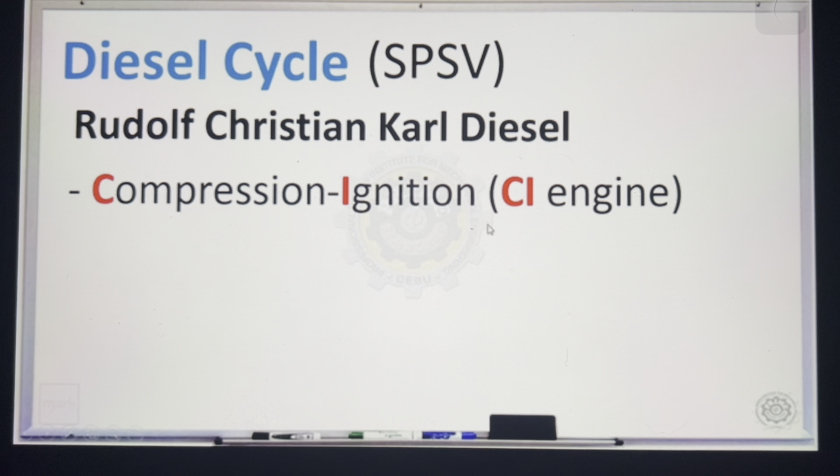Diesel cycle. Ang nag-develop ng diesel cycle, si Rudolf Christian Karl Diesel. Yung process involved sa diesel, SPSV, sabi ni Diesel. Kung ang Otto cycle, tinatawag na spark ignition cycle, ang diesel cycle naman, tinatawag siyang CI engine or compression ignition cycle. The ignition of the fuel, which is injected into the combustion chamber, is caused by the elevated temperature of the air in the cylinder due to mechanical compression. So in this cycle, hindi na kailangan ng spark plug to initiate the ignition. Sapat na yung pagko-compress. Once i-compress mo, dahil sa compression, nagkakaroon na ng ignition inside the cylinder. So this is CI engine.

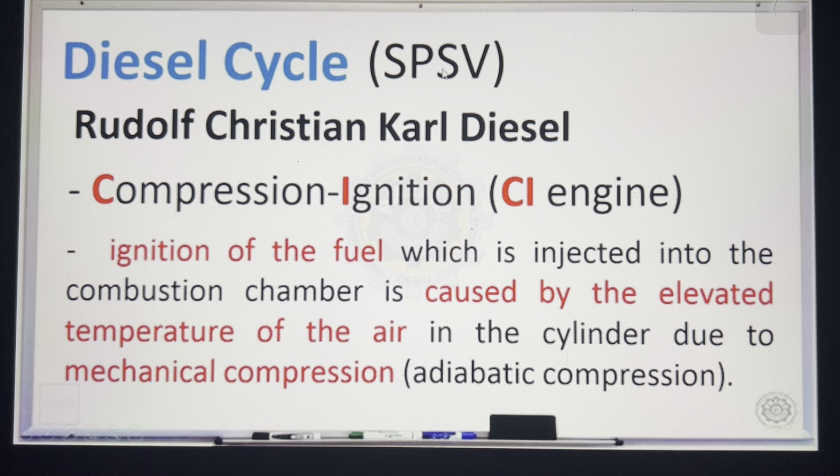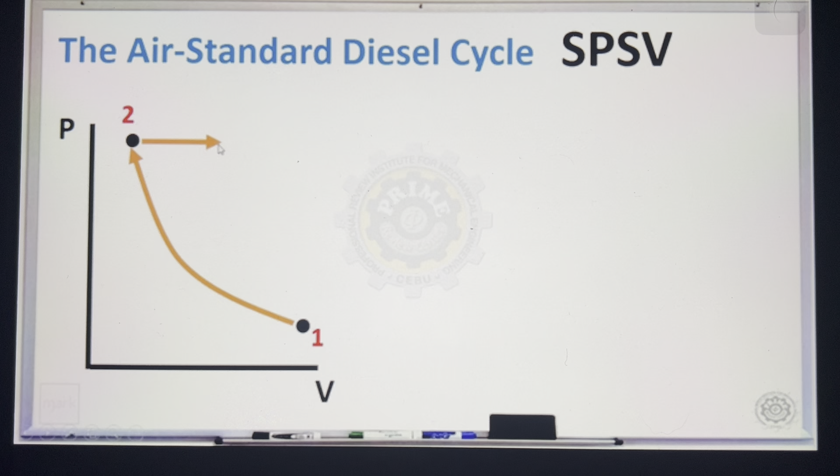Ngayon, ang palatandaan natin dito or technique, SPSV, pero kailangan siyang i-drawing sa PV diagram. Kailangan na-drawing natin sa PV diagram para meron tayong guide. Simulan natin dito, isentropic. 1 to 2, isentropic compression. 2 to 3, isobaric. 3 to 4, isentropic. And then, 4 to 1, isometric. So, ito yung PV diagram ng diesel.

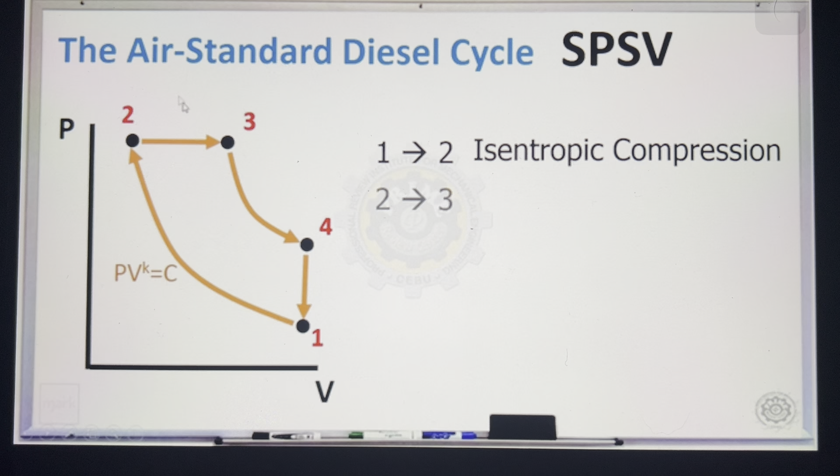1 to 2, isentropic, lumilit yung volume, compression. 2 to 3, dito papasok yung init. This time, isobaric yung process. So, 2 to 3 is isobaric heat addition. 3 to 4 is isentropic. Lumalaki yung volume, expansion. And lastly, 4 to 1, dito lalabas yung init. Constant volume yan. So, isometric heat rejection.

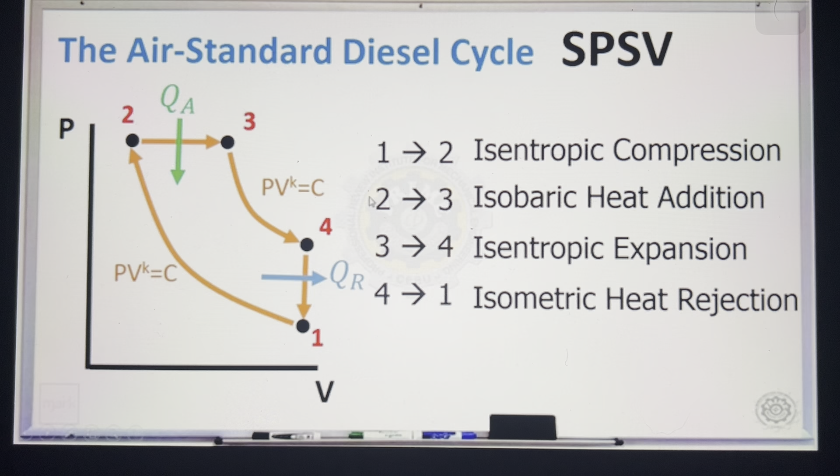Yung process na yan, yung mga pangalan na yan, hindi naman dapat kabisaduhin kung naiintindihan yung PV diagram. Kailangan naiintindihan ito. Ngayon doon tayo sa mga formula. Still, ito pa rin yung general formula natin para sa mga power cycles. Ngayon maging specific muna tayo.

How to get QA? Ang QA nangyari sa constant pressure process. Ibig sabihin, MCP delta T. Ang delta T natin is T3 minus T2. Pag QR naman, pinag-uusapan, constant volume yan. So that should be MCV. Temperature difference, T4 minus T1.

Yung CP, mga constant yan. Ang CP ng air sa SI, 1.0062. Sa English, 0.24. Ang CV ng air, 0.7186. Sa SI, sa English, 0.171. So, please memorize constant. Memorize yan.

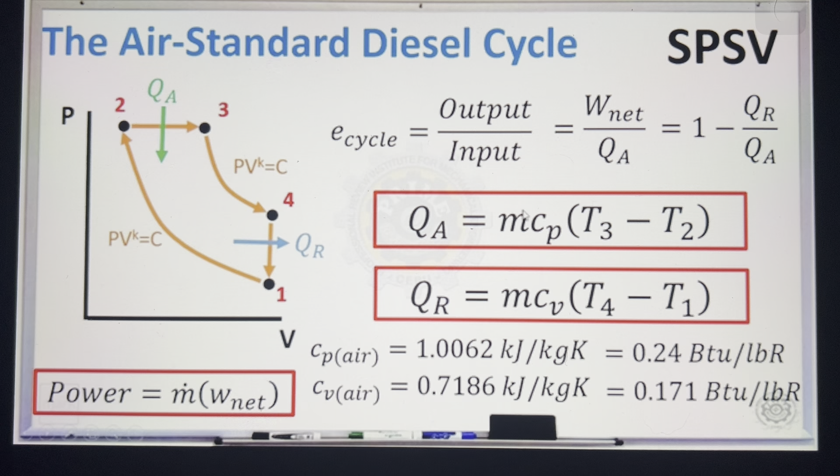Para makakuha ng power, mass multiply sa specific work net. Pag ang kailangan specific QA tsaka specific QR, assume nyo lang yung mass to be 1. Kasi, ang unit natin per kilogram or kaya per pound. So, pag yung mass 1, specific yung answers.

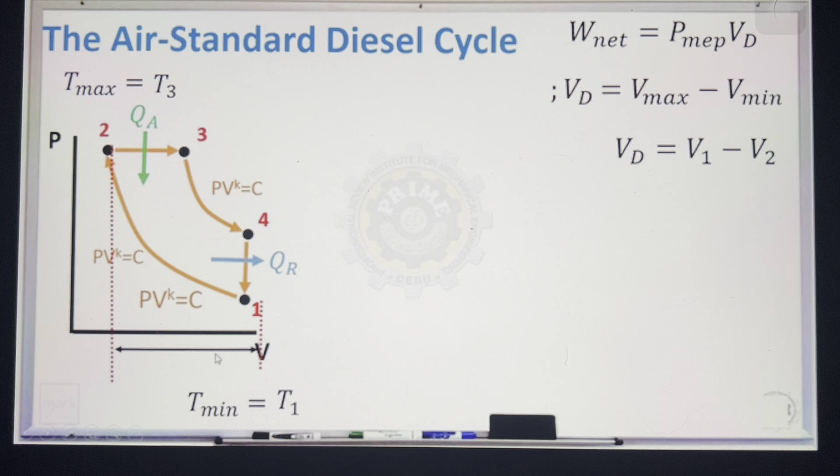Same concept, work net is PMEP VD. Ang VD is maximum minus minimum. Ang maximum volume is V1, ang minimum volume V2. So by inspection, ang maximum temperature in the cycle is yung point 3. And then ang minimum temperature is yung point 1. Still, andito yung ating volume displaced. Andito yung clearance volume. Same analysis.

Ganun pa rin yung formula, hindi nagbago. Clearance volume is CVD. Yung RK, compression ratio is maximum over minimum. That is V1 i-divide ng V2. Tapos, ang formula natin na C, dinerive natin kanina, that is 1 all over RK minus 1. Same formula yan sa Otto cycle. Ang nadagdag sa diesel cycle is yung tinatawag ng cut-off ratio.

Remember na yung cut-off ratio nandito sa QA. Ratio lang yan ng dalawang volume. Malaki over maliit in this part. Tandaan na, yung mga ratio natin greater than 1. Ang cut-off ratio is V3 over V2. Ngayon, pwede pa natin yan palitan in terms of temperature.

For example, kung i-consider mo yung process 2 to 3, ang process 2 to 3 is isobaric. So, if you will apply the combined gas law, P2, V2, T2, parehas dapat sa P3, V3, T3, and then you can cancel out yung pressure kasi constant pressure tayo. So, lumalabas yung ratio ng volume na V3 over V2, parehas din pala yan sa ratio ng temperature, T3 over T2. Dito na-derive yung relationship.

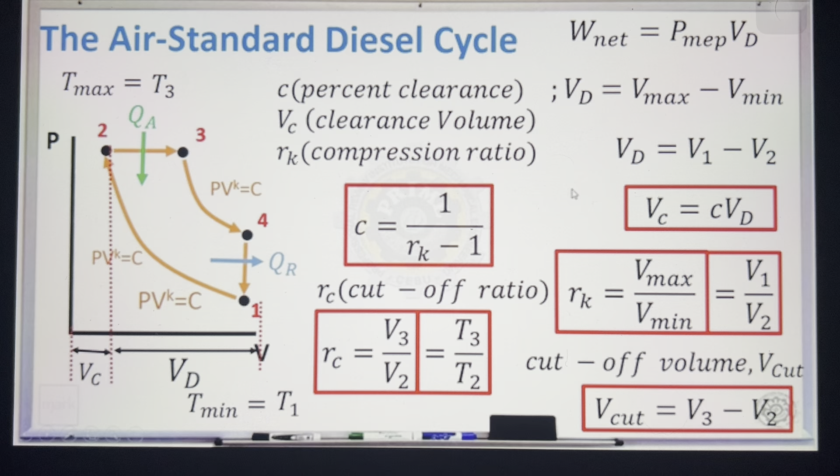Dito, pwede na tayo mag-solve ng mga problem solving. By the way, meron din pala tayong shortcut regarding sa efficiency. Pinaliwanag natin sa Otto na ang shortcut ng Otto, 1 minus 1 over A. Pinaliwanag kanina. Ngayon, for diesel naman, ang shortcut ng diesel cycle is 1 minus B over A. So, effort tayo regarding sa A and B.

Yung A, okay, that is RK raised to K minus 1. Yung B naman, para madaling maalala, tingnan mo ito, gagawin mo itong C, tapos ibaba mo yung minus 1. Yung K, ibaba mo dito, and then copyin mo yung RC minus 1 na may parenthesis. Mag-effort para yung mga formula makabisado. Kasi sa simula, mahirap. Pero kung lagi nyo itong isusulat, makakabisado nyo rin yung A at B. Gamitin yan para mabilis makuha yung efficiency. So, this is for Otto.

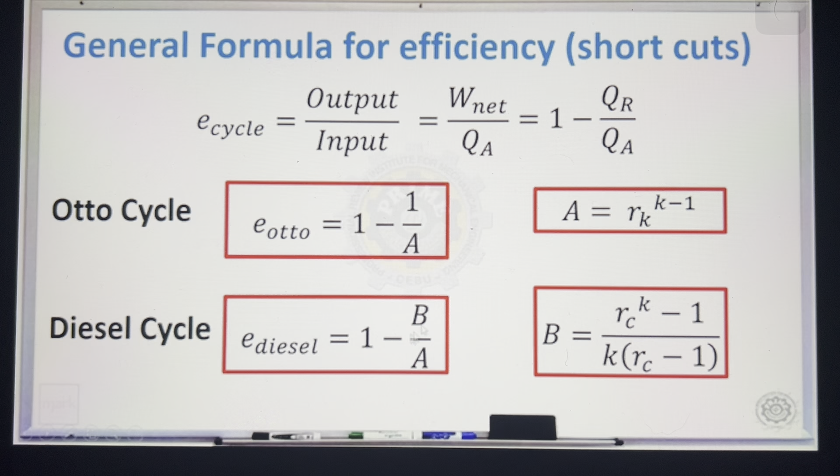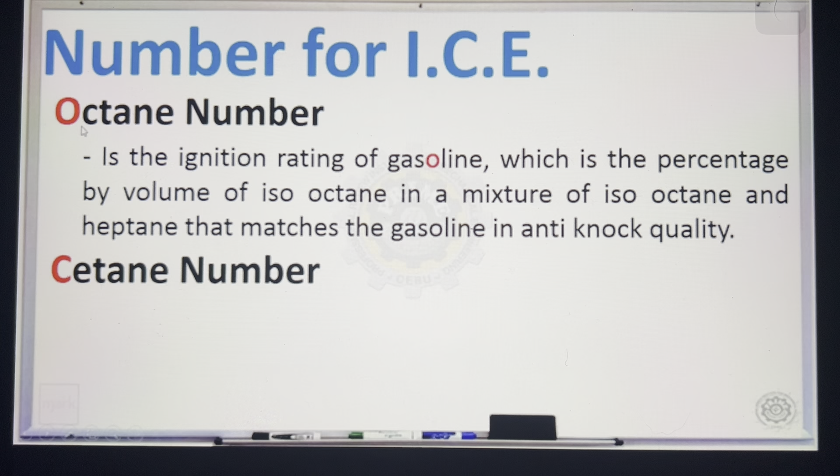This is for diesel. Okay, last is some definitions. Pag tinanong tayo ng octane number, para yan sa ignition rating ng gasoline. Ang palatandaan ko, yung gasoline na word, merong O, kaya octane. And then yung cetane number naman, ignition rating para sa diesel. Yung D, okay, sa ABCD, katabi niya yung C. So, kanya-kanyang paraan para matandaan. Gawa ng paraan ma-memorize yung mga terminologies.

So, these are properties or formula regarding sa diesel cycle. Ang gawin natin, mag-solve tayo ng sample problem. Diesel cycle, problem solving.

At the beginning of compression of an ideal diesel cycle using air, it has a pressure of 15 psi, temperature of 75 degrees Fahrenheit, and a specific volume of 13.2 cubic foot per pound. For the compression ratio of 15 and heat addition na 352 BTU per pound, calculate the following: Letter A, temperatures and pressure at the end of compression, at the end of heat addition, and at the end of expansion. Heat rejected, net work, efficiency, then power. Then you have last scenario, the thermal efficiency of a cycle having the same constant initial conditions and compression ratio, but with constant pressure heat addition of 500 BTU per pound. So, maraming possible questions. Isa-isahin muna natin.

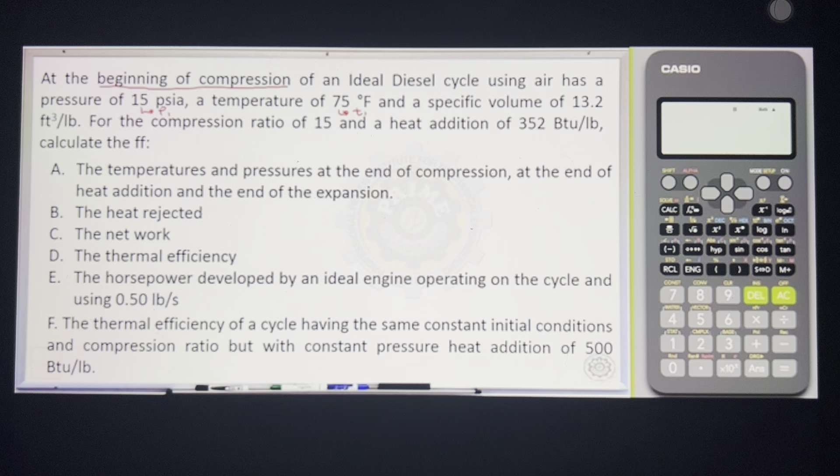Una, nagbigay ng beginning of compression. Ibig sabihin, ito yung point 1. Pressure 1, this is temperature 1. And then, yung 13.2, ito yung specific volume 1. Nagbigay ng compression ratio.